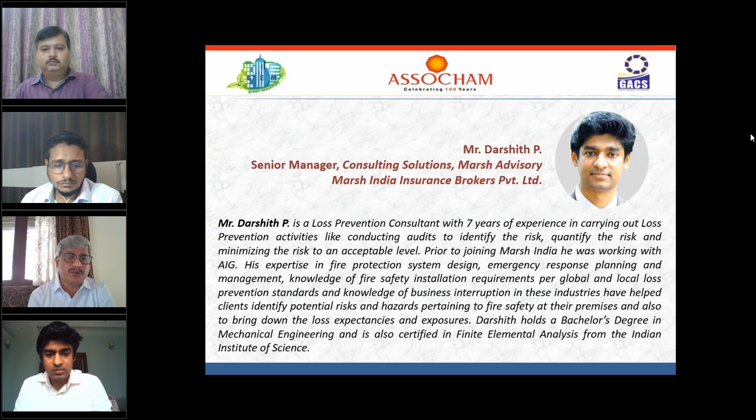Thank you, Abbas Sahib, for the brief introduction. Before we move on to our subject, which is annual pump performance test, a small disclaimer: the information provided in this presentation is based on our experience and just for information purposes only. Please do not consider this as final advice or a recommendation, as the situation may differ from site to site.

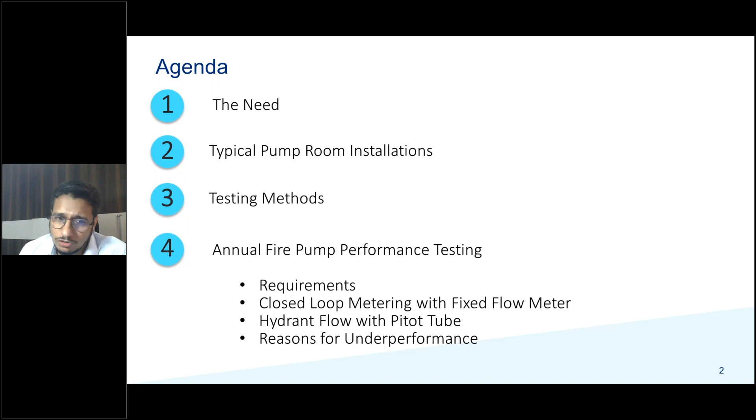Now coming back to our presentation. So this is our agenda, where we will discuss the need for fire pump performance testing, what are the typical pump room installations which are important for testing, testing methods, and then my colleague Darshith will take you over for the annual fire pump performance testing requirements, how it needs to be done, the procedures, and then what are the typical reasons for underperformance of those fire pumps, if at all that is the case.

Let's start with the need. So when we say fire pump, the most important thing is we all understand that fire pump is the heart of any fire protection system.

Now, when we talk about performance of a fire pump, how do we basically judge the performance of a fire pump? There are several characteristics. The first important thing is how we have designed the fire pump, whether considering the highest demand for the sprinkler system, the deluge, hydrant, or hose reel, or some combination where a single fire pump system caters to both automatic fire protection system and the hydrant system. But the baseline is the highest demand.

So when I say highest demand, it is basically the flow, the maximum flow required, and at what pressure we need to deliver the water. So the three important parameters, power, flow, and pressure, are very critical while determining the pump performance test.

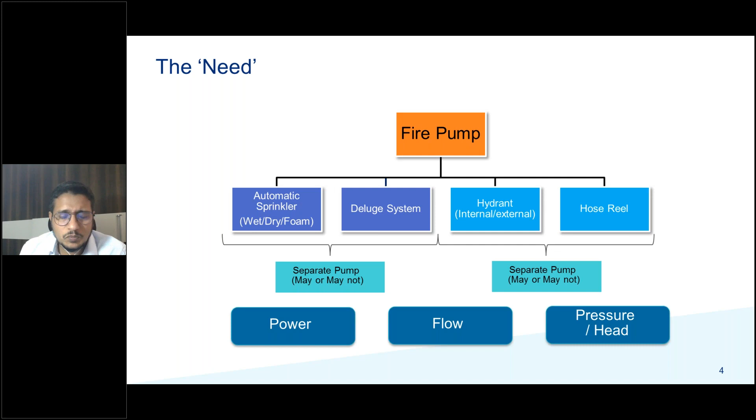Now, what is the important goal of a fire pump? During an emergency, the pump should start automatically. If not automatically, manually it should start. Initiate the necessary signals to alert the responding people. Then supply the required demand, as I said earlier, flow and pressure, for controlling the fire. And at the same time, because the fire will take time to control, provide water till that duration.

Now, typically, the start of the pump, either manually or automatically, and the signals, those are typically checked by most organizations on a weekly, monthly, or even daily basis. However, when we talk about performance—whether the flow and pressure are available as per the design—those are things which need to be done on an annual basis. And in a lot of places we have seen this is one of the most important missing aspects which needs to be addressed.

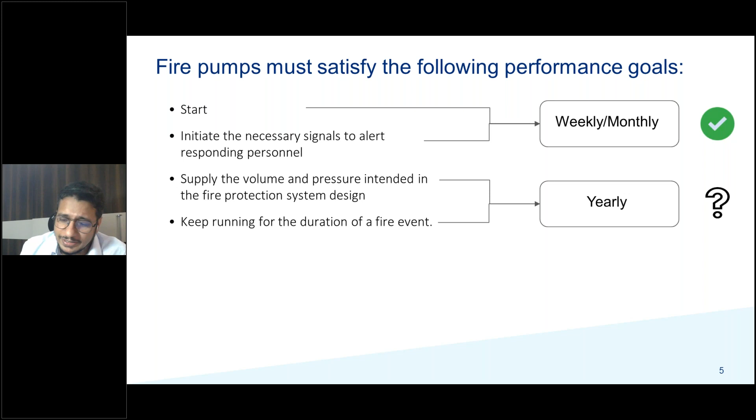Now, when we say annual fire performance test, which is yearly, what is the code requirement? Before we go to the code requirement, one important characteristic of a fire pump, which is different from any other water pump or process pump, is that all fire pumps are designed to provide 150% of the flow at 65% of the rated pressure. This is a very important fire pump characteristic, defined by international standards like NFPA, FM, local standards like IS standards, and even earlier TAC. All have defined that the pump needs to perform at 150% flow at 65% pressure.

And at the same time, looking at the shut-off pressure, that maximum shut-off should vary from 101 to 140%. Now, standards like NFPA, formerly TAC, and even OEM suggest doing a fire pump performance test on a yearly basis. So let's see—this is the guideline which has been provided.

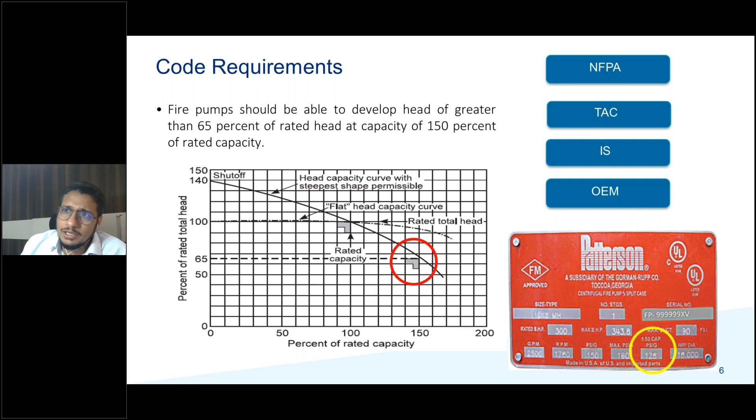Now, what we have done is a sort of survey. Our organization has done a survey, and we'll see some of the results regarding whether fire pump performance testing is happening or not. So we surveyed around 151 sites—83 were industrial, 68 sites were commercial.

Now, maximum, which is 45% of the sites, does have a test line, but the issue is it is a smaller size. What is the adequate size of the test line? We will see in a later slide when my colleague Darshith takes you through the presentation.

These are two important infrastructure issues we have seen. Apart from that, the other bucket of findings is wherever test lines are adequately designed, there were issues of improper arrangement, including unavailability of control valves, and the distance between the flow meter and the control valves.

Another thing was, even if they have all the arrangement well as per the design, the issue was not performing the testing properly - particularly not running the pump till 150%. And finally, even when that was done, the interpretation of the data was not happening in a proper manner. These were the challenges we categorized as human element or procedural challenges. There were some sites, around 5%, who are doing the correct procedures.

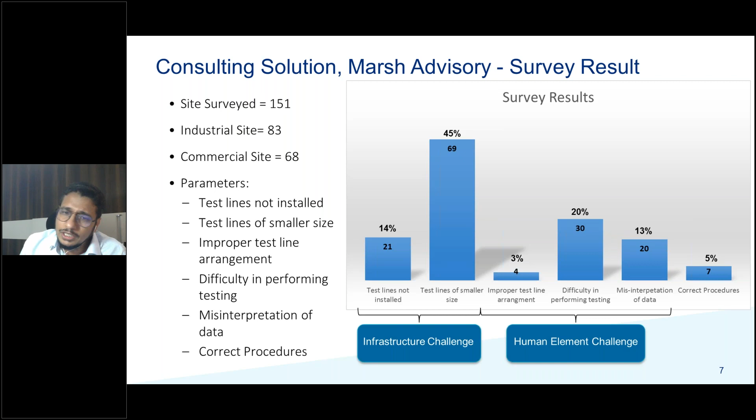Next slide please. Now before we move into fire pump testing, let's see some of the critical pump installations. We are not going to go through each and every installation, but some of the important ones, starting with the suction line.

This is the diesel engine fire pump setup. We have a suction line with a suction control valve first, then we have the suction pressure gauges, then the diesel engine fire pump, and then a discharge pressure gauge, then the pressure relief valve.

This pressure relief valve is very important. The reason I have highlighted it, although it is not part of the fire pump testing, is that the setting of this pressure relief valve actually impacts the entire pump performance testing. That's why we have included it in this slide.

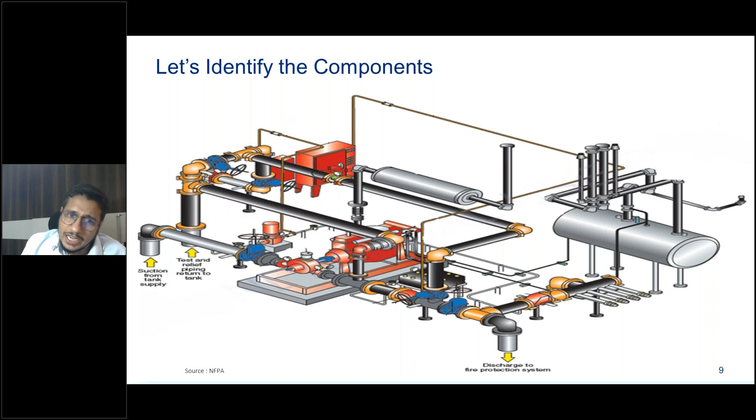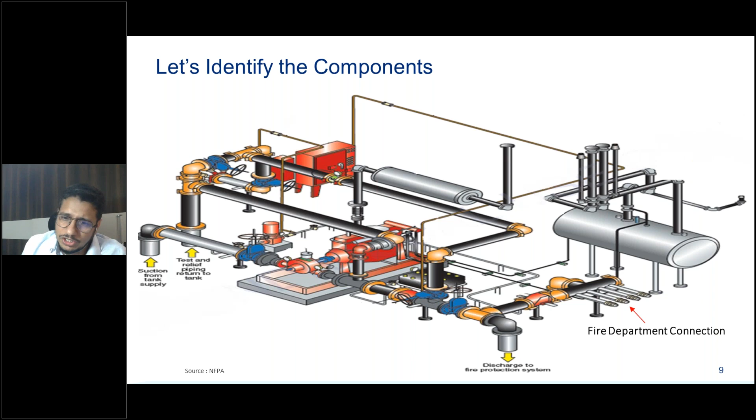The next one is your check valve, followed by your discharge valve, then you have a test header. The test header comprises the flow meter shown in this picture. Then we have the jockey pump, used for maintaining the pressure, then the fire pump controller for auto start of the pump, then the diesel tank since it's a diesel engine, and finally the fire department connection. These are the typical pump room arrangements.

Now let's see the different testing methods. There are many ways of doing fire pump testing; however, we have highlighted the top 4 methods, and the 5th is an arrangement for when other testing methods are not available - what can be done to still perform the fire pump testing. Let's start with the first method.

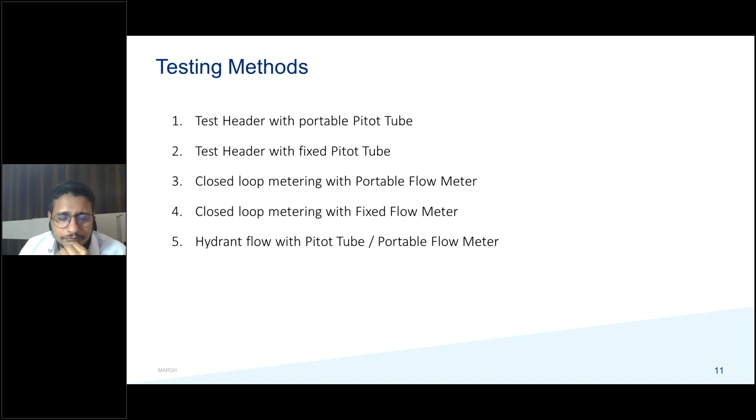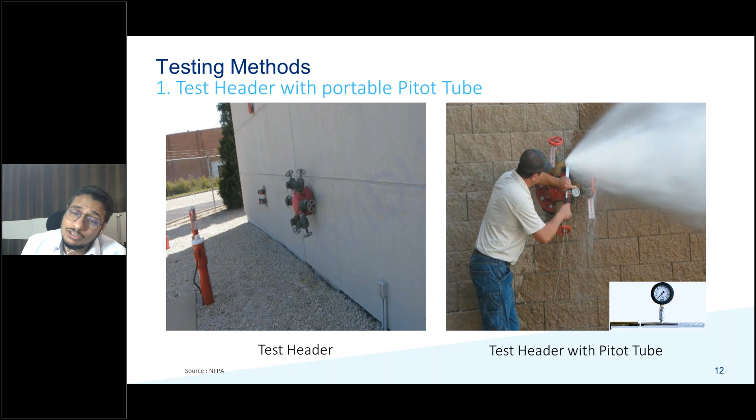The next method uses the same test header but with a fixed pitot tube. Earlier we saw a person holding the pitot tube; in this case, the pitot tube is fixed.

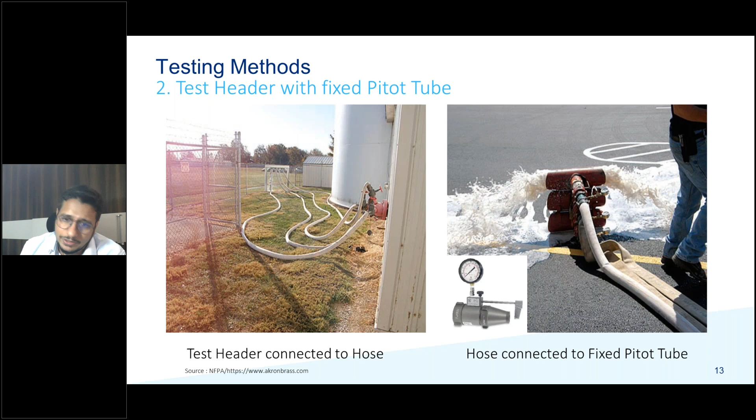The third one is the closed loop metering. We call it closed loop because in the earlier slide, the pump discharge was outside the pump room. In this closed loop system, the water goes directly back into the fire tank, so there is no wastage of water.

Now with a portable flow meter, if you have a test line with adequate size, we can use an external flow meter like an ultrasound flow meter and still do the testing. This is called closed loop metering with a portable flow meter.

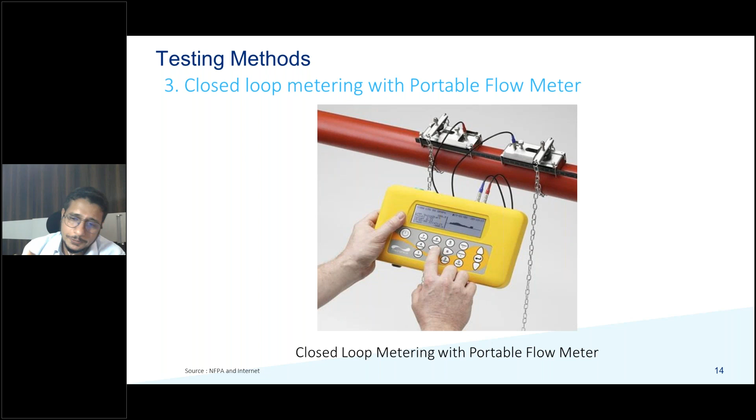The next one is with a fixed flow meter, using a similar test line. However, the earlier picture used a portable ultrasound flow meter, while here it's a fixed flow meter. It can be either a Venturi type, an orifice type, or a magnetic type flow meter.

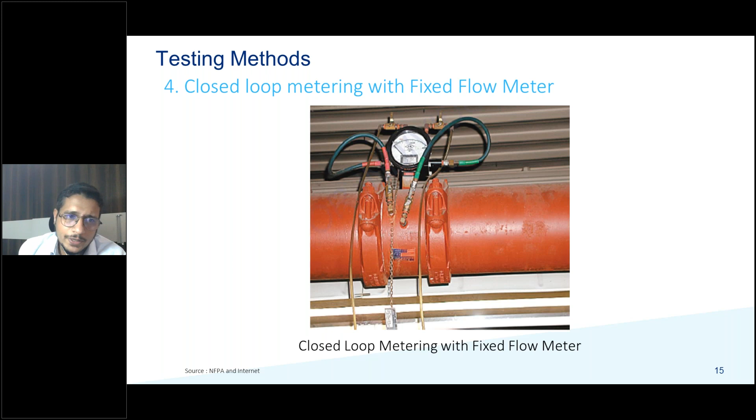Finally, if you don't have any of these arrangements from the earlier slides, you can still do testing through your hydrant points using apparatus like a pitot tube and a portable flow meter. My colleague Darshith will again guide you on how we can use this procedure.

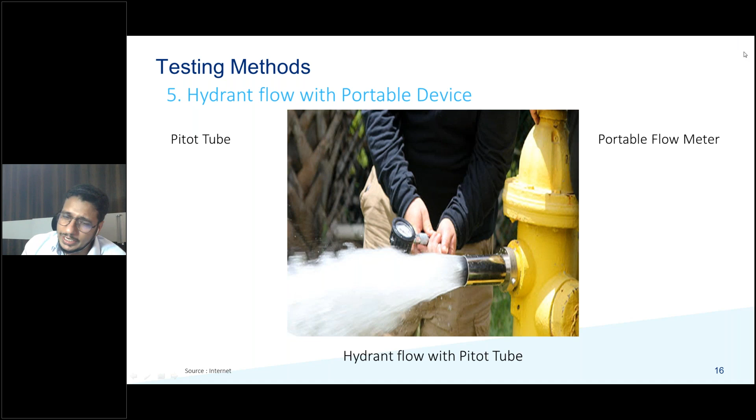Now, the first method where we use a test header with a portable tube: because we are using a header and discharging water outside, there is high wastage of water. As I said earlier, a person is required to take the reading. This is important because the water is discharging at a very high pressure, from 8 to 9 bar, so it needs to be done by an expert. That's why we say it's good to have a preferred expert for this testing.

The results, depending on how the person is doing it, can range from moderate to good accuracy. And the costing typically involves the hiring of an expert.

The next procedure is with the fixed pitot tube. Here we have eradicated the involvement of a human for taking a reading, so the accuracy becomes excellent. The only challenge is such apparatus is not easily available in India, so you probably have to import it, and if you're doing it through an external agency, you have to hire them on a yearly recurring basis.

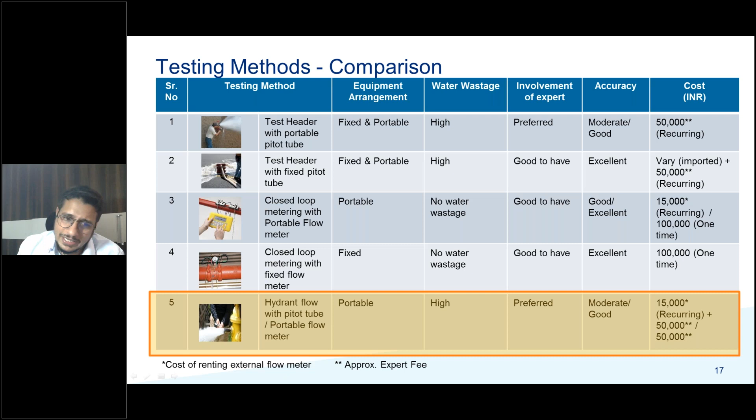Now, what we will see in the next slide is how we need to do this pump testing. My colleague Darshith will take these slides forward from here onwards, covering how to do a fire pump testing, what are the requirements, what is the procedure, and what are the challenges. Darshit, over to you. Thank you, Inayat.

So now, since we have seen the various testing methodologies of how to carry out the annual pump performance testing, let us look at some of the basic minimum requirements needed to do this particular test.

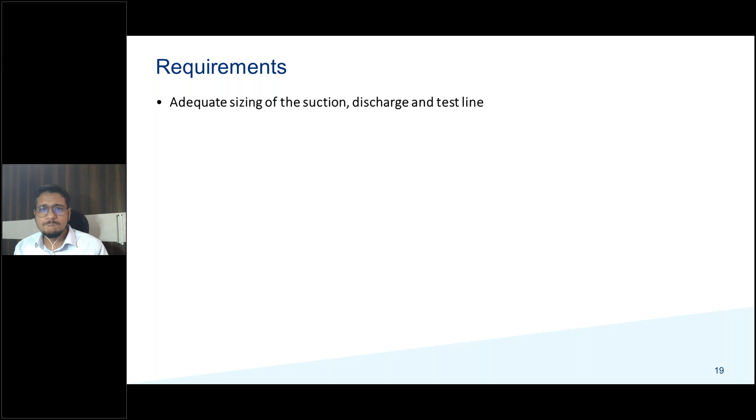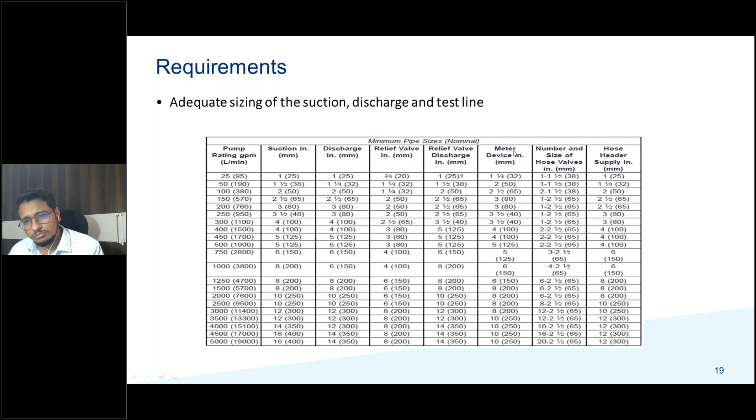There are two reasons for this. One, because we do not want turbulence acting upon the system, which could actually damage the fire pump. Also, for the annual pump performance test, we would be flowing at least 150% of the rated capacity from each pump. Hence, we need a test header capable enough to flow this requirement.

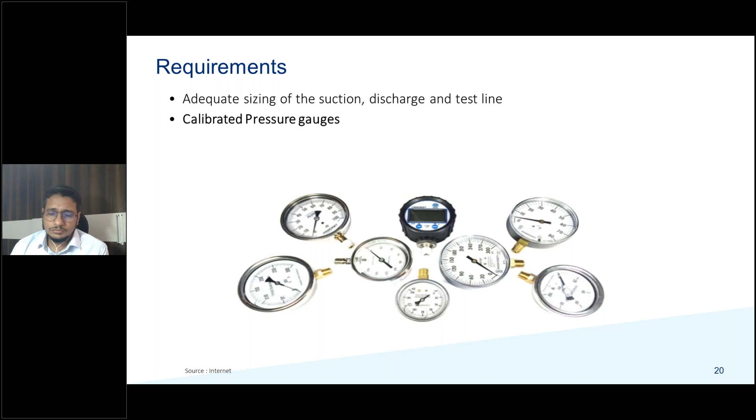The second thing is the calibrated pressure gauges. We need pressure gauges to measure the suction as well as discharge pressures. If these pressure gauges give faulty readings, if they are not calibrated, then the results we get by doing the test would also be incorrect. Hence, we would require calibrated pressure gauges.

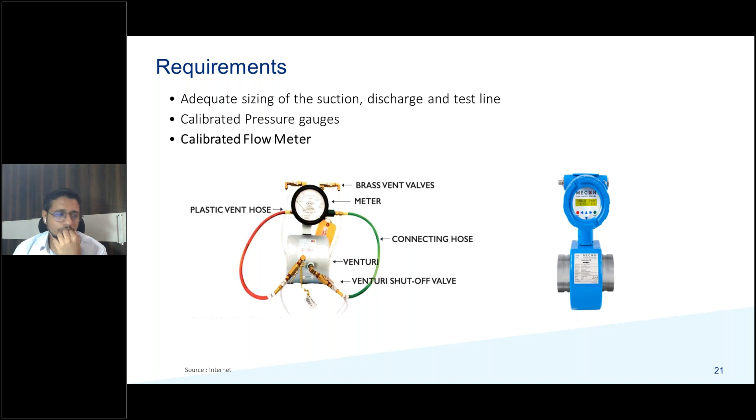As Inayat mentioned earlier, we would also be needing a calibrated flow meter. This type of flow meter could be a fixed type, or it could also be a portable type, which we'll be seeing in the subsequent slides.

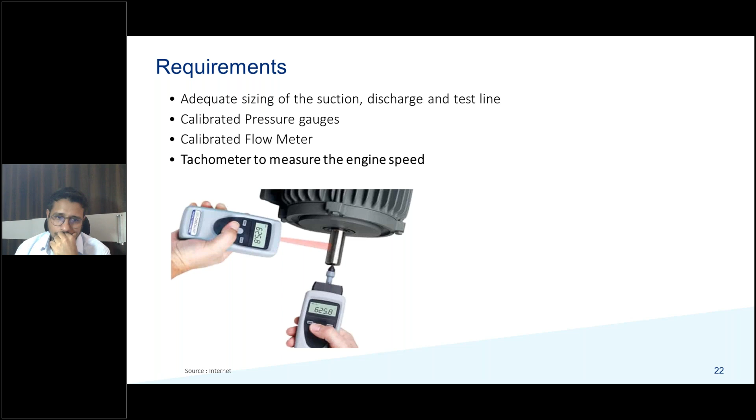Majority of sites would also have a speedometer already installed with the pump, but as consultants we would always recommend making use of a calibrated handheld tachometer to do the testing, and comparing the results with the speed given by the installed speedometer. If both readings match, it is well and good. Else, it is always better to rely on the results provided by the calibrated tachometer.

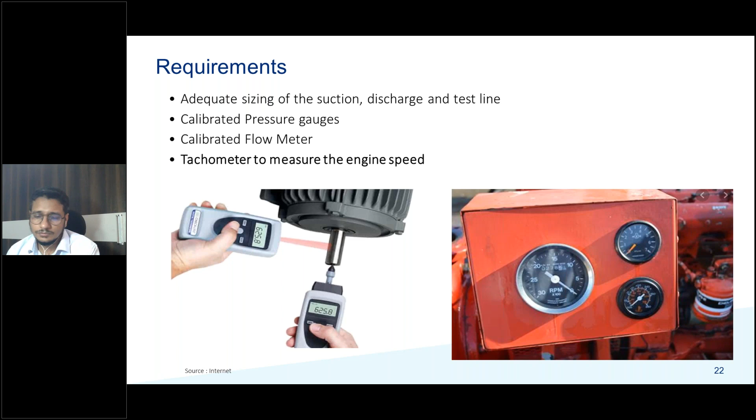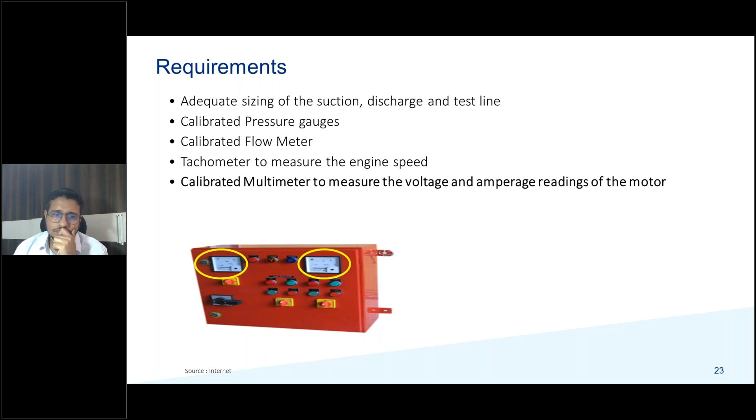The next requirement is a multimeter or a means to measure the voltage as well as amperage readings of the motor, mainly for an electric motor driven pump. It can be a voltmeter or an ammeter fixed in the pump controller, as seen in the first image, or you can make use of a clamp-on ammeter to verify the readings, or use a multimeter. Why we need this, we'll be looking at in the subsequent slides.

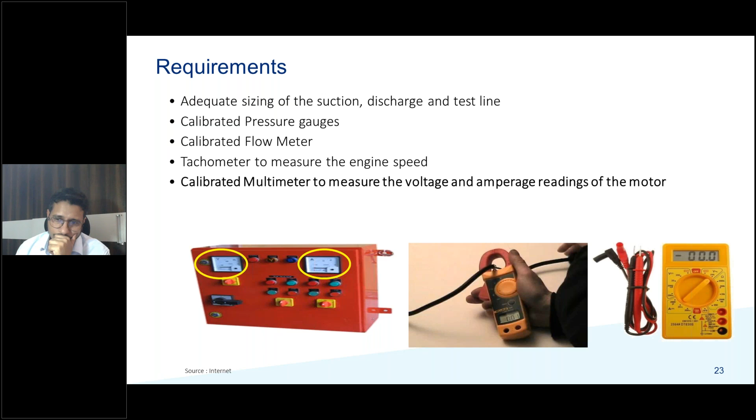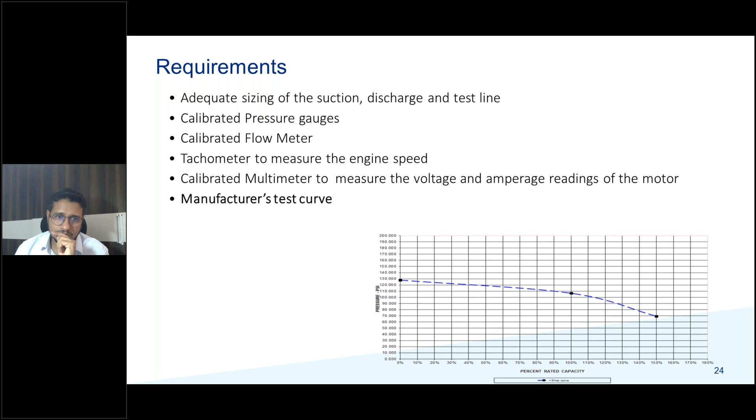One of the most important parameters required is the manufacturer's test curve. Each and every installed pump has its own characteristic curve, basically a plot of pressure versus flow. Whatever results we get by conducting this annual performance test, we need to compare to this manufacturer's test curve. If the readings are in line, or if there is a huge variation, based on this comparison only we would be able to say if the pump is performing well or the performance is inadequate.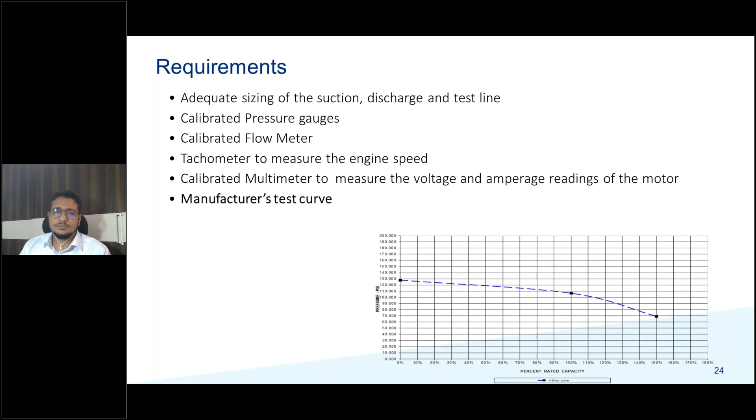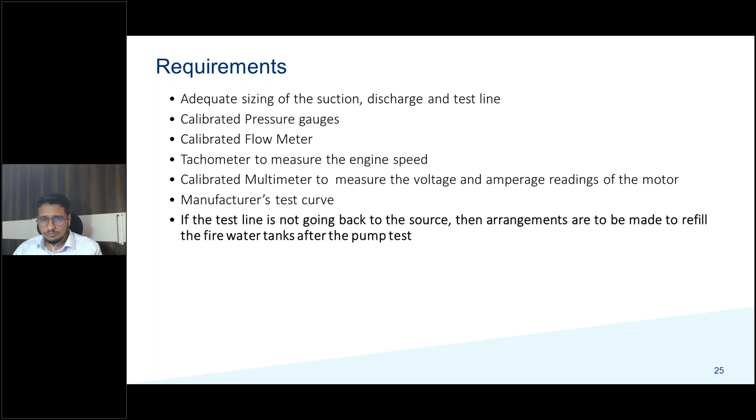Since there are other areas or means to test the fire pump, if the test line is not going back into the tank, we'll also have to make arrangements to refill the fire water tank after the fire pump test is done. If we are testing 1, 2, or 3 pumps, since we are flowing 150% of the rated capacity, the fire water tank would be drained, hence we would need to refill the same. And lastly, we would need arrangements to refill the diesel day tank, mainly for the diesel engine driven pump.

Now let us look into the testing procedure for conducting an annual pump performance test by making use of a fixed flow meter.

In this illustration, we are considering a fire pump room comprising 3 pumps: one electric motor driven pump, one diesel engine driven pump, and one jockey pump. This setup can be for a sprinkler system or a hydrant system. This is just an illustration; majority of sites might not have a similar condition or might have more pumps. The first and foremost thing we do is a visual evaluation of the entire pump room, to see if there is adequate lighting, to see if the pump operator has access to test or try the valves and to move around the pump room. That is the first basic step before starting the test.

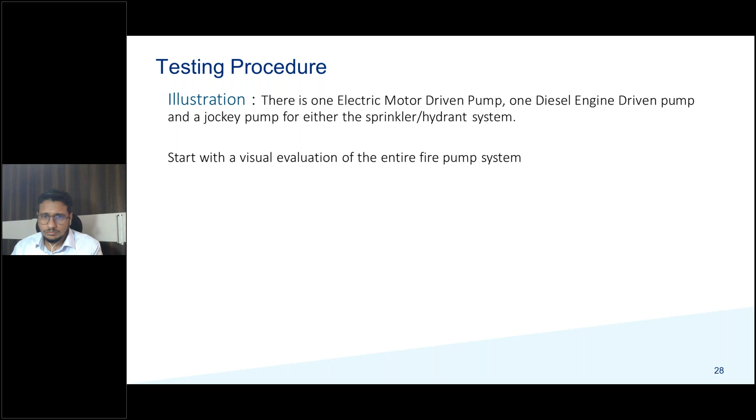In this annual fire pump performance test, we need to flow water at different points. There are 3 basic points where we flow the water and record the pressure readings: at churn, that is 0% flow; at rated capacity, which is 100% flow; and finally at 150% of the rated capacity.

Since we know the rating of the pump beforehand, we can make use of the table indicated below to record our readings. This table can be used for both a diesel engine driven pump and an electric motor driven pump. Since we know the values, these can be populated in the table before the start of the test.

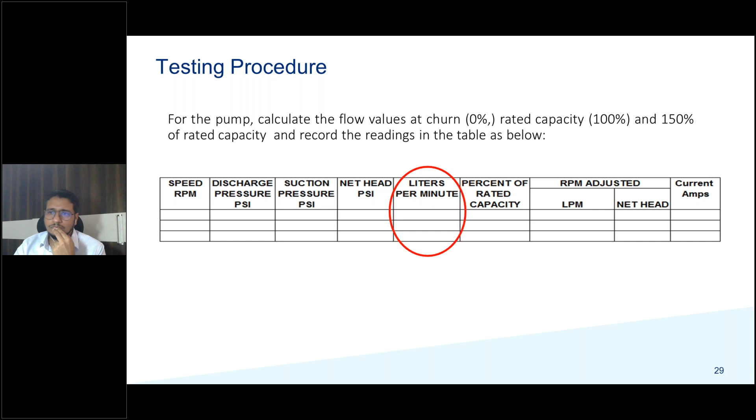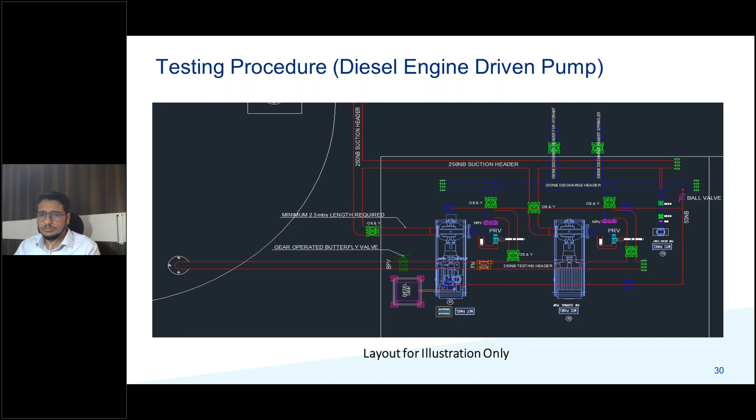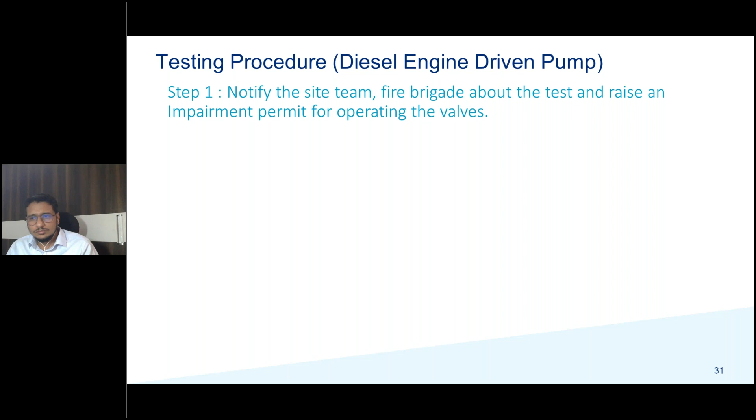Since we are doing the testing procedure for the diesel engine driven pump, let us see what needs to be done. The first and foremost thing is to notify the site team as well as the fire brigade about the test being done, and during the test the fire pumps would be impaired. We also don't want the site team to open any hydrant valves while the test is conducted. They should be mindful that the test is going on, and extra vigilance needs to be put in during the test because the fire protection system is impaired. We would also need to operate some of the valves.

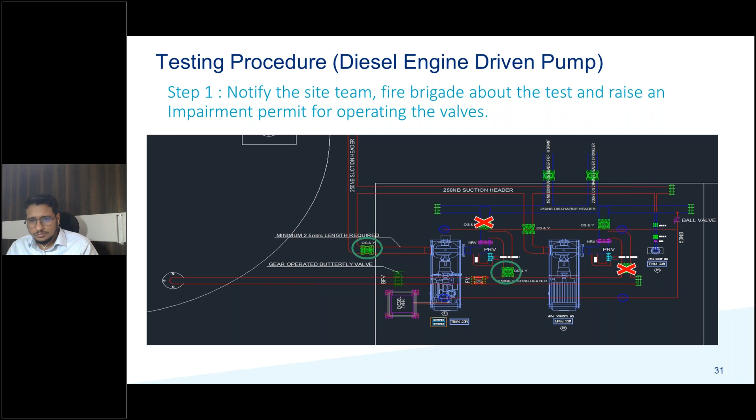The next thing is to keep the jockey pump as well as the electric motor driven pump in manual mode, and to start the diesel engine driven pump automatically.

Once the diesel engine driven pump starts automatically, you can see the water gets sucked into the suction header, and this is how the water would flow. Since we have kept the electric motor driven pump in manual mode, it would not be discharging any water. Hence the water would only be discharged by the diesel engine driven pump which is running.

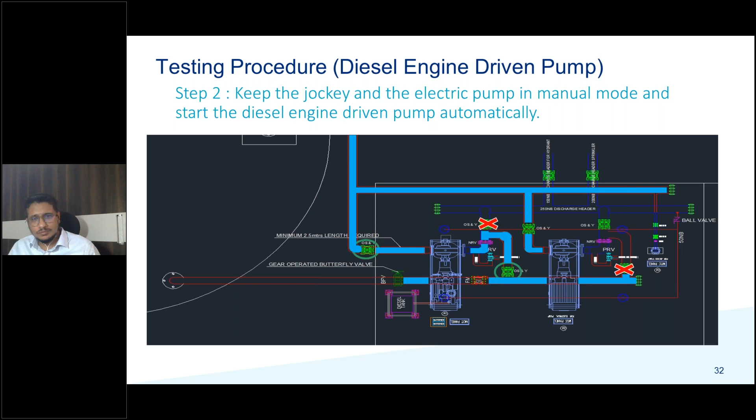Since we have closed the valve at the discharge side of the diesel engine, the only way for the water to now enter is along the testing header. We have also closed the valve connected to the testing header from the electric motor, this particular valve, so the water would again not flow in this direction and feed into the discharge header. Since a butterfly valve is also closed at this point, the water is also not going back into the tank. So this is the step wherein we take the readings for the churn condition.

Let's assume the pump is a 2800 LPM pump. So the readings I'll be looking for in the flow meter would be 0 at churn condition, 2800 LPM at rated capacity, which is 100%, and 4200 LPM at 150%, which is 1.5 times of 2800.

Once this is established, we record the readings for the churn condition by making use of the tachometer to record the speed. We would record the discharge as well as the suction pressures from the pressure gauges, and the net head would basically be the difference between the two.

Once this is done, you can also see on the right hand side there are two columns which say RPM adjusted LPM and net head. For a diesel engine, the speed of the engine is not constant. The speed actually varies with the flow, and we need to be mindful of recording or adjusting the head as well as the flow with that of the speed.

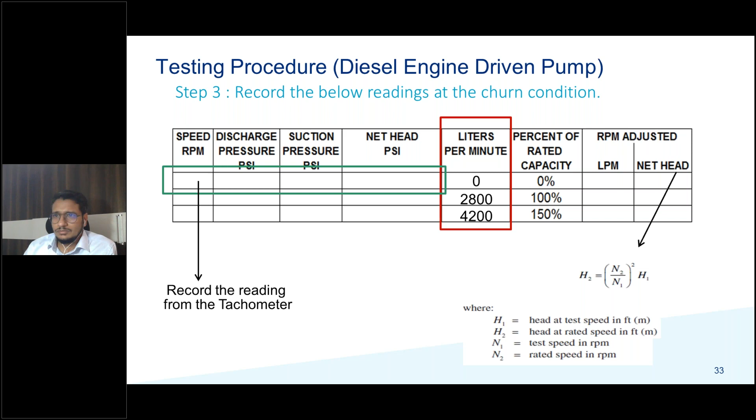For this, we make use of the affinity law. You can actually see the affinity law shown here for the head calculation. Similarly, we also use another affinity law to calculate the flow as well, as shown here.

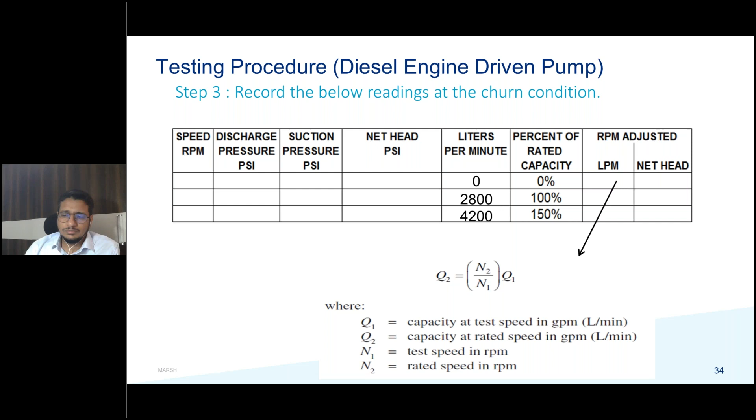Apart from this, another important parameter we need to consider is, since it is a diesel engine driven pump, we need to be very mindful to see if the speed of the engine is set to the rated speed indicated in the name tag. So what we do is start the pump, flow 100% of water, and see what speed we are getting from the engine. If that speed is not matching or is not near the nameplate speed, we will have to adjust the speed setting, because without that the results in the subsequent process will actually be wrong.

Let's say the pump is rated for 1800 RPM and the engine is rated for 1800 RPM, and at 100% flow we get a speed of 1700 RPM. There we'll have to adjust the speed nearer towards 1800 RPM and then carry out the test. Also during the test, if there is water flowing from the relief valve which we saw earlier in the illustration, we'll have to terminate the test and figure out the reason why the relief valve is flowing water.

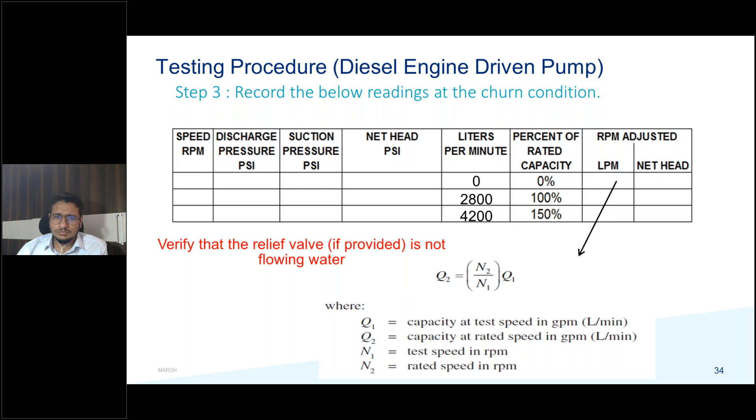Once the reading approaches 2800 LPM and it stabilizes, we take the readings. We check the speed, the discharge, as well as the suction pressure readings, and the calculations for the RPM adjusted can be done at the end of the test.

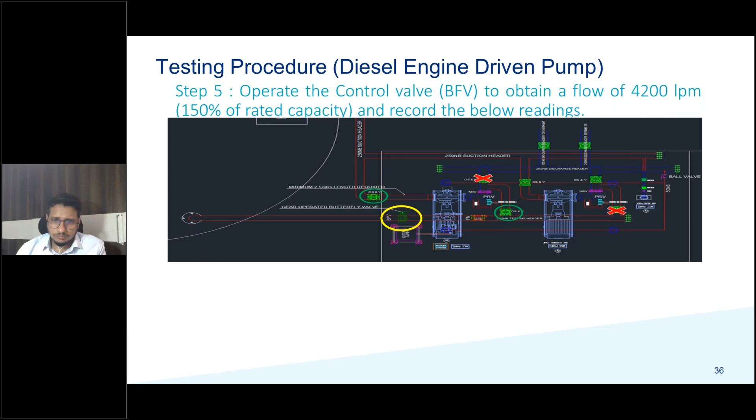Once the rated flow reading is obtained, we again need to open the butterfly valve so as to flow 4200 LPM, which is our 150% rated capacity. Once the reading showcases in the flow meter and stabilizes, we again record the speed, the discharge, as well as the suction pressure heads.

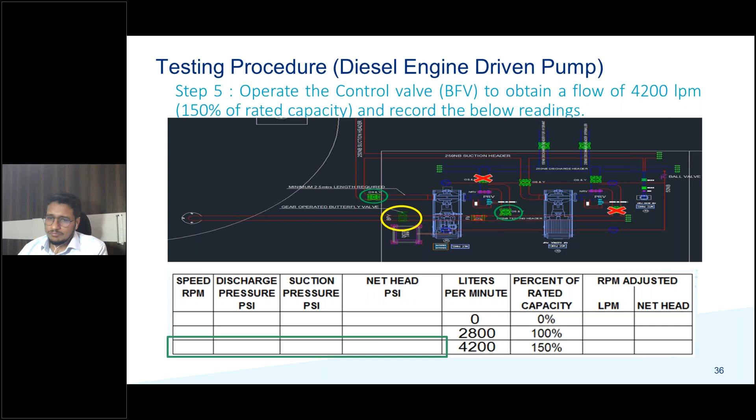Please do note that the percent of rated capacity we are flowing are basically nominal points. Since we have to draw a curve at the end of the pump test, we consider 3 points. Ideally these 3 points are usually taken, but this is not always the case, and we can make use of other flow parameters like 50%, 100%, 125% as well. The more the number of points, the smoother the curve.

Once these readings are recorded, we slowly close the control valve and shut down the pump manually. We normalize the system back into its original state. We put the jockey in auto mode and let the jockey pump build the pressure back into the system. We notify the site team as well as the fire brigade about the completion of the test, put the valves back to their original position, and also close the impairment permit.

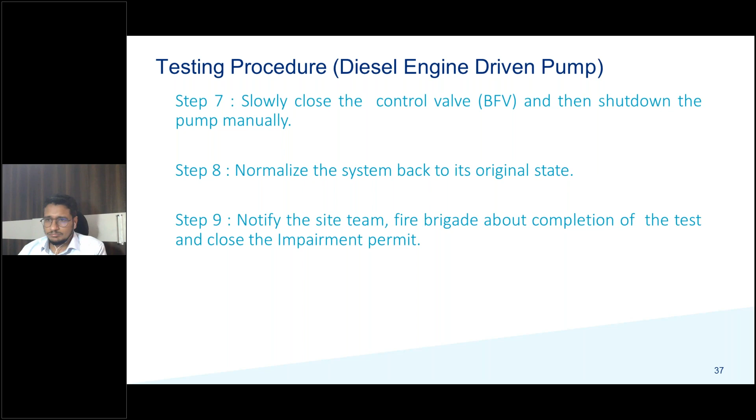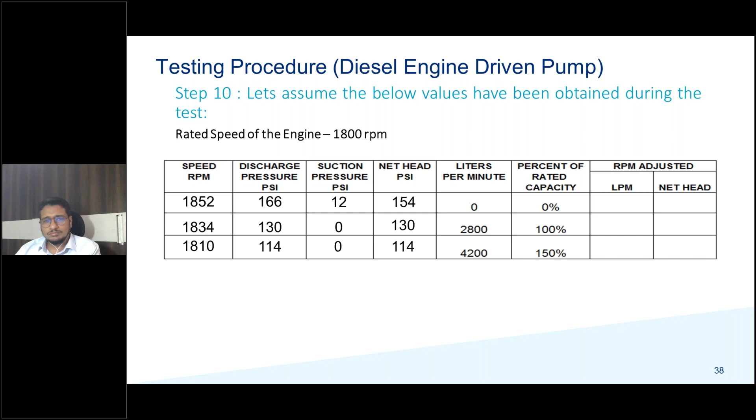After this, let us assume that we have gotten the below readings, and the rated speed of the engine as per the nameplate of this pump is 1800 RPM. Let's say these values have been obtained by the procedure we did earlier. After this, we calculate the RPM adjusted head as well as the flow.

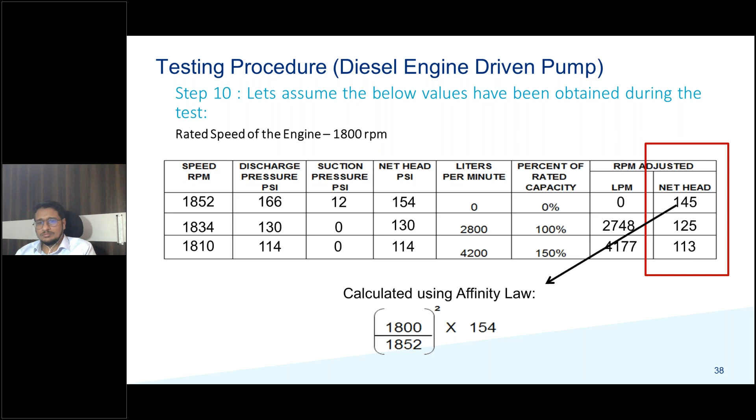Once these values are obtained, we need to plot a graph of the net head versus the rated capacity, which is basically the pressure versus the flow. Instead of making use of the flow, we can also plot the graph using the percentage of the rated capacity. It's just that the x-axis will have consistent readings across, and it is much easier to see. That is the only reason.

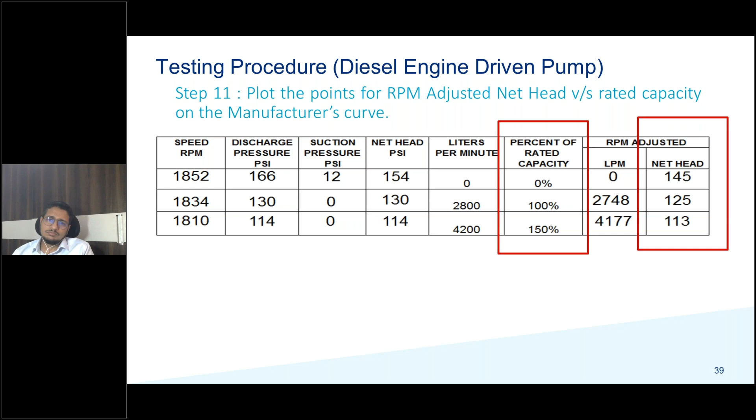Once we plot this particular curve, you can see a dotted curve, which is nothing but the shop curve or the manufacturer's test curve. We plot these 3 readings. At 0 flow, we have 145, which is our pressure reading. At 100% flow, we've got 125, which is the second point. And at 150% flow, we have the third point, which is around 113 PSI.

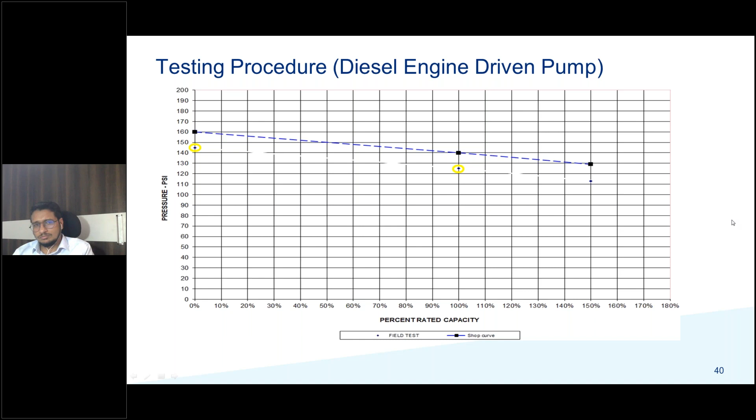We draw a freehand curve to connect the points. Once this is done, we'll have to compare this curve with that of the manufacturer's test curve to see how much is the variance and to say if the pump is performing or underperforming.

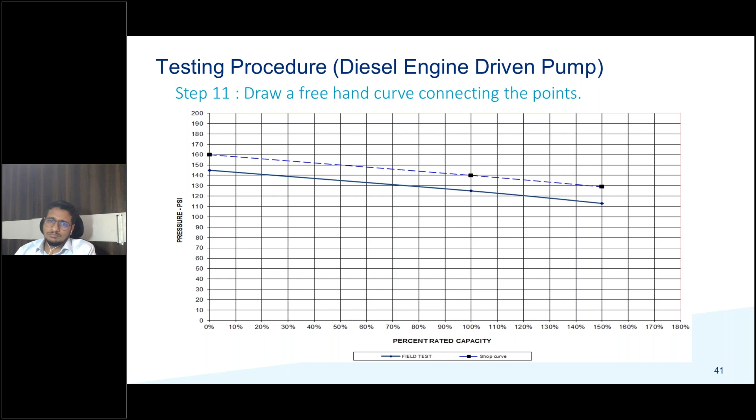This is basically the behavior. This slide indicates the behavior of the field test curve. The red-orange curve with the square box is basically the manufacturer's shop curve. This is nothing but the characteristic curve which the manufacturer would have given to the site during the installation as well as the commissioning. You can see 3 different curves as shown in the graph.

One is the field test curve, which is the green curve, similar to that of the manufacturer's shop curve. Here the pump is performing exactly the same as that of the manufacturer's test curve.

The second field test curve is basically the blue curve. You can see that the readings are almost nearer to the manufacturer's test curve till the rated capacity, but as soon as 100% rated capacity is reached, there is a huge drop in the curve. And the last curve is similar to what we have seen in our test as well, wherein there is a drop from the beginning of the test until the end.

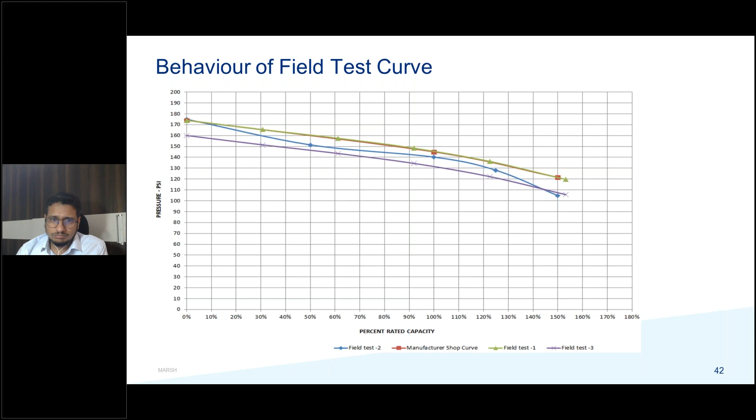So from 0% till 150%, there has been a consistent drop in the pressure readings. So this would be the underperformance. What we're basically trying to say here is different types of pumps have different manufacturer test curves, and while conducting the test, the results can vary from perfect to a lot of variation in comparison to the manufacturer's test curve.

Once these readings are obtained and the graph is plotted, we verify the variance. If the variance is well within 5%, we say the pump is performing well when using NFPA standards. Whereas FM Global standards say that if the pump performs within 10% of the variance, the pump's performance is considered satisfactory. But as consultants, we would always recommend keeping this parameter as minimum as possible and as close as possible to the manufacturer's test curve, at least well within 5% of the variance.

If this is not the case, let's say the pump has underperformed during this test. So although we have seen results showing underperformance, please don't be disheartened. Since this is a closed loop system wherein water is not discharged out, we can redo the test again to see if the readings are changing. If we get similar readings as the earlier test, then we'll have to investigate the reasons for the underperformance in the pump and take corrective measures.

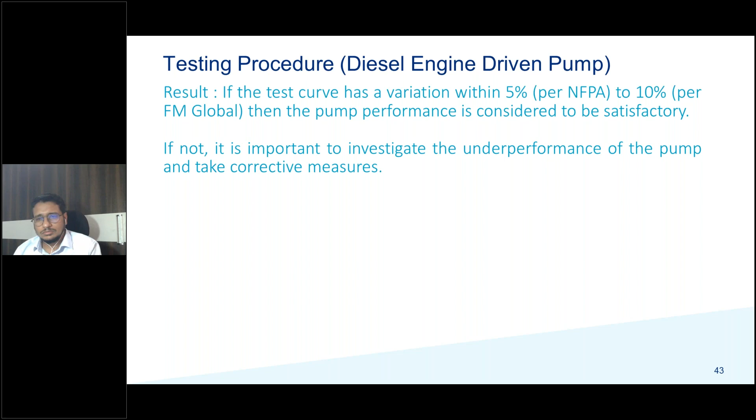Also, during the entire course of the test, we will need to monitor the fire pump operation for any unusual noise or excessive vibrations. We'll also note down other parameters, since this is a diesel engine driven pump, in terms of oil pressure, operating speed, water and oil temperature, to verify they're within the acceptable range. We'll also need to verify the casing of the pump for overheating during the test. If any of these drawbacks are seen, it is always suggestive to terminate the test and rectify the issues.

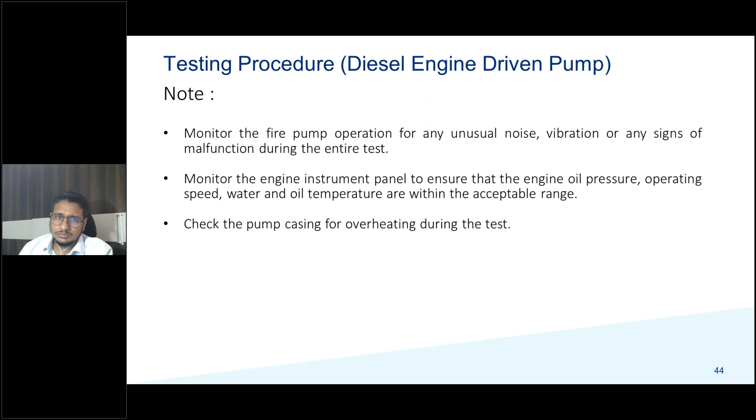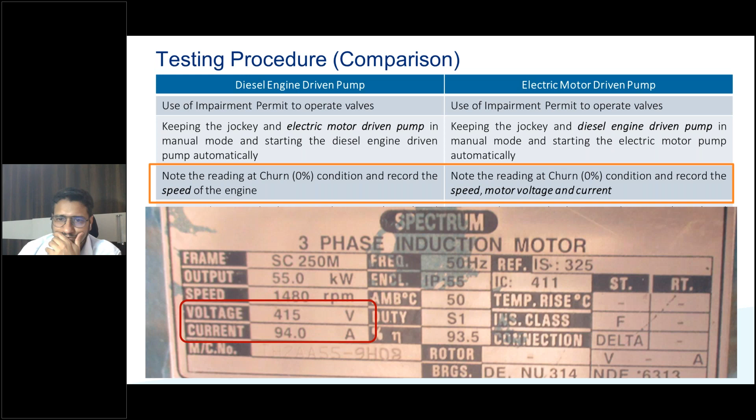Also, the cables used during this particular test for an electric motor driven pump need to be rated similar to that of the motor itself, so that the cables don't overheat and we don't burn them up during testing. Apart from this, the rest of the procedure remains the same in terms of operating the butterfly valve or control valve to obtain readings at 100% and 150% of the rated capacity.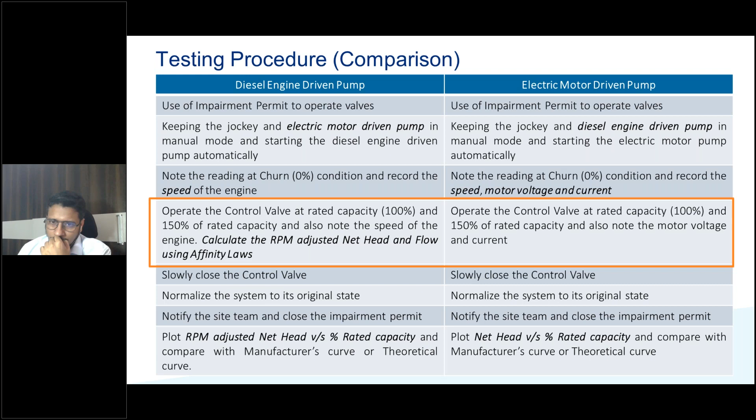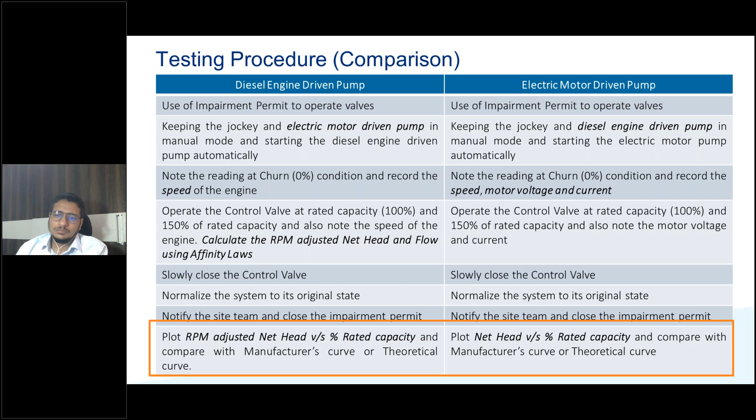But instead, we don't calculate any RPM adjusted head or flow here, because the speed of the motor is almost constant. Finally, instead of plotting the graph of RPM adjusted net head versus capacity, which we do for a diesel engine driven pump, we directly plot the results of net head versus percentage rated capacity, and verify the results against the manufacturer's test curve.

So let us look into another methodology of doing the test, wherein we flow water from the hydrants and measure the flow by making use of a pitot tube.

This slide gives the procedure of how to carry out the test. The first and foremost thing is we need to identify the hydrants which are closer to the pump room, because if there are any issues which the pump operator sees during testing, we can easily terminate the test. Also, the hydrants we select to flow water should be in such a place that since we are flowing water outside, we don't want to flood the site or any areas within it.

Again, we do a similar visual check of the entire fire pump room to verify if there is adequate lighting, if the pump operator can easily move around, and the valves are easily accessible. And if there is a relief valve provided on the pump, we need to ensure that it does not flow any amount of water during the entire course of the test.

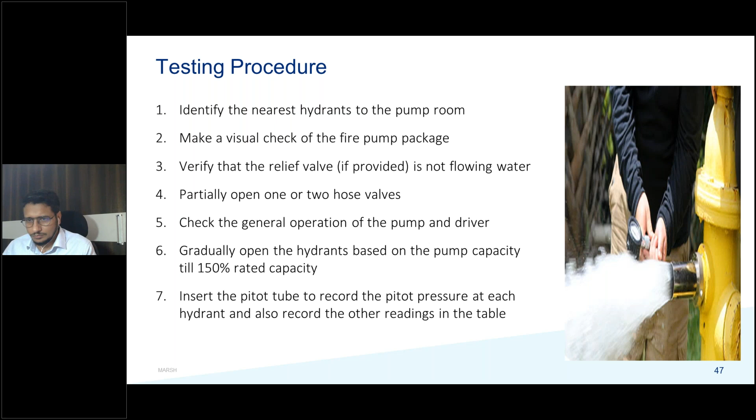So we partially open one or two hose valves to start the pump automatically, and we also observe the general operation of both the pump and the driver. Once this is set up, we start opening the hydrant. As you can see in the picture, we open the hydrants and insert the pitot tube to check the pitot pressure. This is ideally a table we usually use to carry out this particular test.

There are two columns which are different: one is the size and number of hose nozzles we are using, and the pitot pressure we get. NFPA as well as FM Global standards have these types of tables, which basically give a theoretical discharge obtained through a circular orifice. You can see different orifice diameters given here, and this is basically the pitot pressure, the reading we get from the pitot tube.

So once we get a reading of 22 psi in the pitot tube, and we make use of an orifice which is 44 mm in diameter, the typical flow we get there is 1620 LPM. So we record the flow to be 1620 LPM.

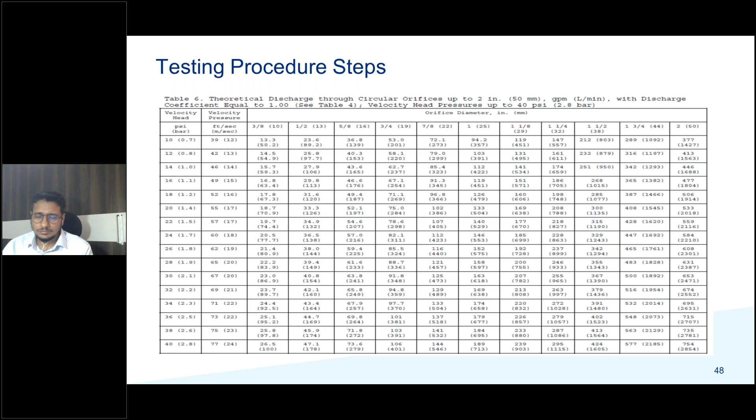Similarly, we open another hydrant point and take the readings. As more hydrant points get opened up, there is a drop in pressure which will be seen in the pitot tube, and correspondingly we take the reading for 1620 LPM in this particular table for the suction as well as discharge pressures.

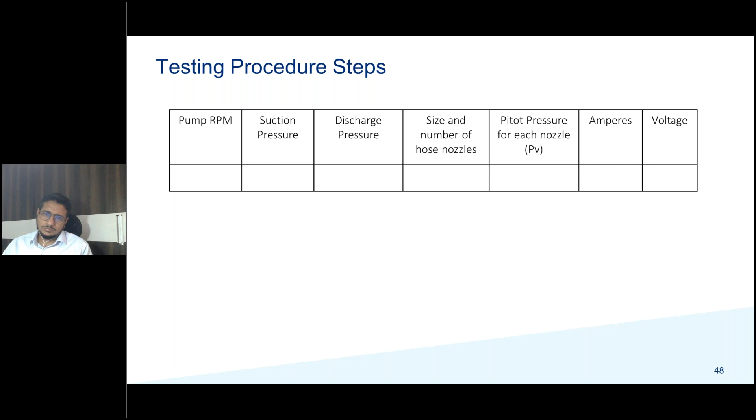This process is repeated to obtain multiple points so that a curve can be drawn and plotted, and compared with the manufacturer's test curve. The only drawback of conducting this particular test is the amount of water used for running 150% of the rated capacity will be higher, so we would need to look into refilling the fire water tank as soon as the test is completed.

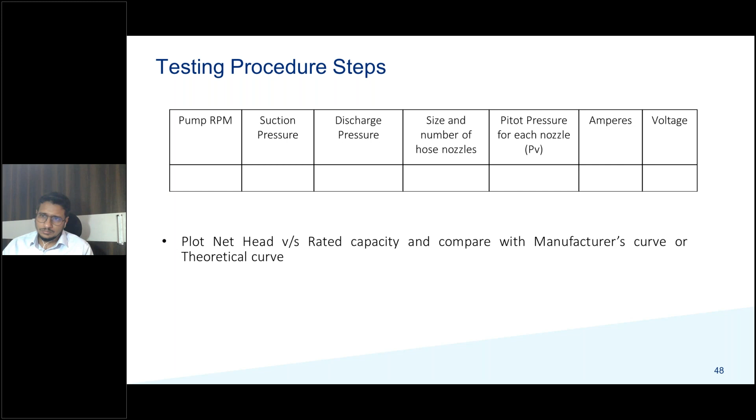Now let us look into some of the reasons where the pump has underperformed.

During the design phase, if the consideration of the net positive suction head is not considered - net positive suction head being basically the minimum suction pressure which will prevent the vaporization of the water - the vaporization would lead to cavitation, which in turn would lead to the pump's underperformance.

If the suction piping itself is undersized - as you saw earlier in the requirement slide, where the pipe dimensions go on increasing with the rated capacity of the pump - if an undersized suction pipe has been installed, the suction side of the pump would not be able to draw a certain amount of water, and hence the discharge would not be in line, which would result in underperformance.

Also, if there is any blockage in the suction side of the pump, it can be debris which has collected within the tank, or it can be debris within the suction piping itself. That would again lead to an underperformance of the pump.

The measuring instruments we are using to conduct the test - if these instruments are not calibrated, the readings we get from them would be faulty, resulting in faulty readings, and hence the end result would be that the pump is shown to be underperforming.

If at all there is air which has gotten trapped inside the casing or the piping of the pump, that would actually result in the underperformance.

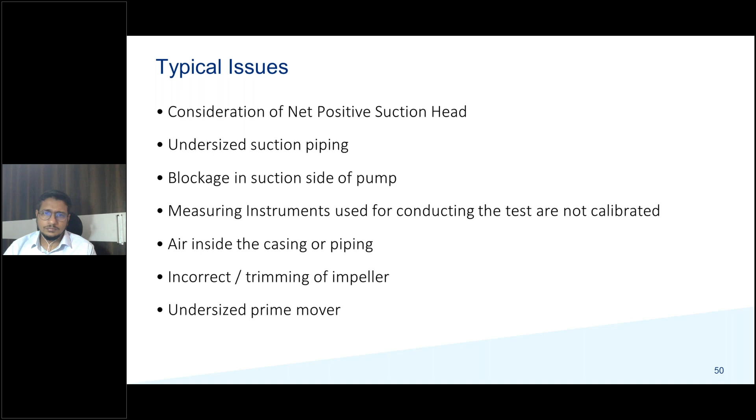One is because of the failure of usage of calibrated measuring instruments. It could be your pressure gauges, the tachometer, as well as the flow meter, what we saw earlier. If at all we record incorrect readings, if the reading shown by the tachometer or the pressure gauge is not correctly recorded during the testing phase, that could again result in faulty results coming up at the end.

So incorrect speed setting, like I said earlier, mainly for a diesel engine driven pump, we need to check what the speed of the diesel engine is set at. So if the nameplate says 1800 RPM is the speed of the engine, we'll need to ensure that at 100% flow, the speed is at least near to 1800 RPM. If it is not, that would result in inaccurate test results while doing the annual pump performance test.

Also, inconsistent use of the measurement units, like mixing of both metric as well as imperial units while doing the calculations, could result in wrong results and hence deeming the pump to be underperforming.

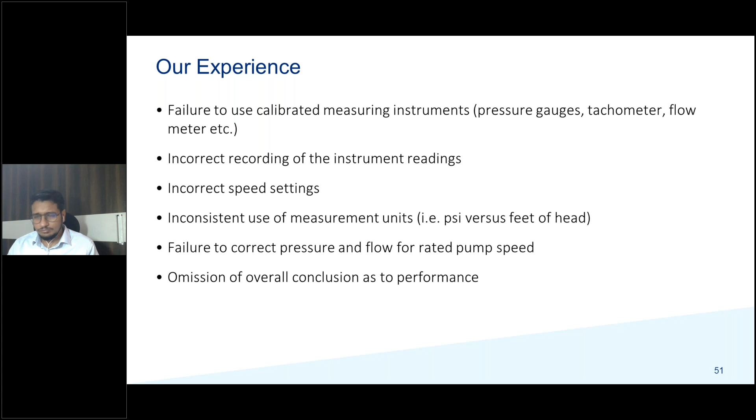So with this, we conclude our session for today and open up the floor for the Q&A session. Over to you, Kale sir.

Thank you, Darshit, for a wonderful session and great insights. I hope I am audible, Darshit. Yeah, Kale sir. Yeah, so there's one.

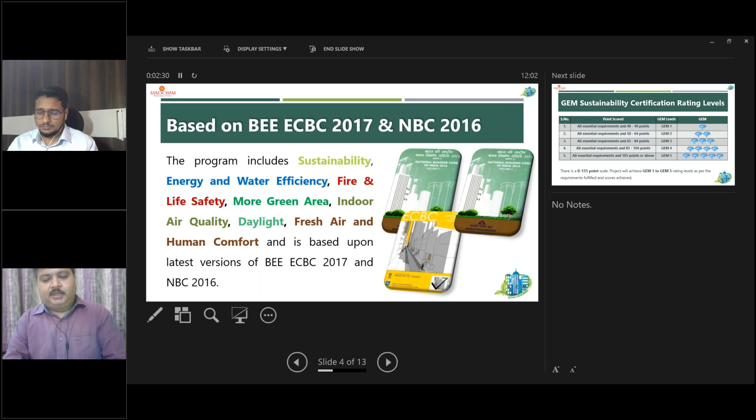So by this way, this program is so smartly designed, and it has 5 levels of rating. One is GEM 5, then GEM 4, then 3, 2, and 1. So 5 is the highest one. It has a maximum of 135 points, and if any project achieves 105 or above, it will achieve GEM 5 rating, and so on.

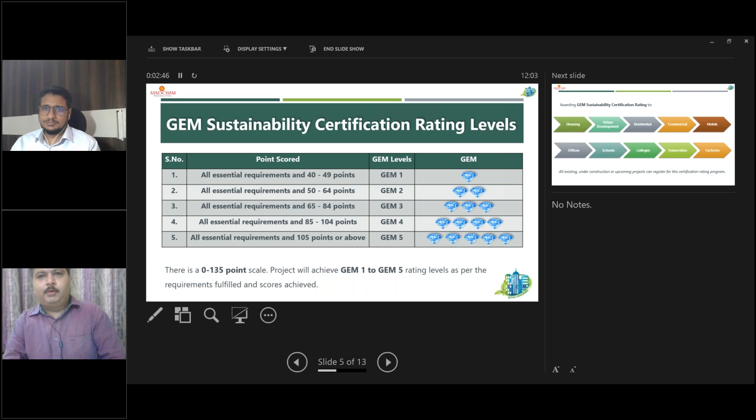This GEM Green Building Certification Program is for housing and urban development, residential, commercial, hotel, office, school, universities, factories, and all. Just like we have star ratings for electronic equipment, we have ratings for buildings as well. So all existing, under construction, and upcoming buildings can apply for GEM Green Building Certification rating.

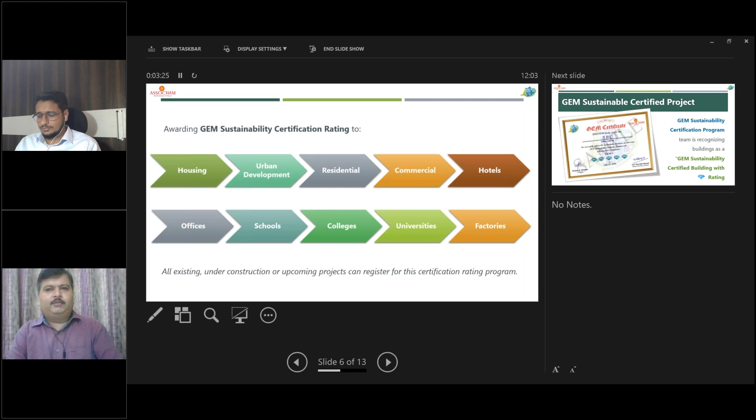And this certificate we provide to the certified GEM compliant buildings, the buildings that are fulfilling the GEM green building certification requirements. This is the certificate. I'm sure we are all engineers and professionals, so this training program is specially for you, friends.

ASSOCHAM GEM conducts the GEM Sustainability Green Building Certification Program for architects, engineers, professionals, energy and environment consultants, and others. This is an online training and examination. We are going to conduct this online training on GEM Green Building Certification Program on 8th of August at 11 a.m. So please join us for this training. I'll share the details with you over email after the program.